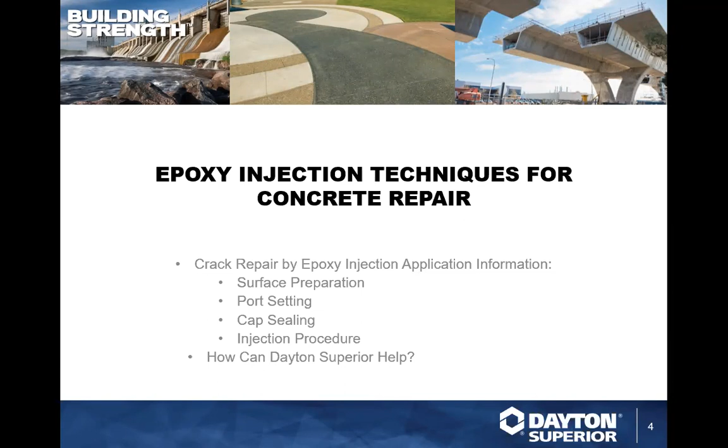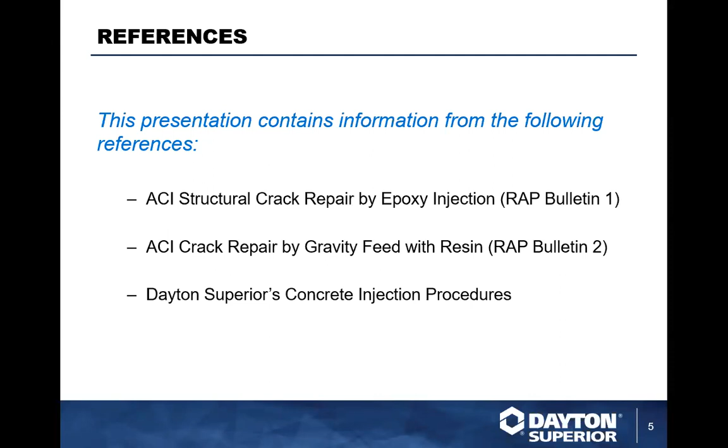Before we get into the weeds, I wanted to point out a couple of documents in particular, especially the ACI RAP Bulletins 1 and 2. The American Concrete Institute has gone through the research and basically standardized everything structural concrete related that there is to regulate and standardize. These two documents are very detailed, very comprehensive in how they address epoxy injection techniques. If you need any information on these documents, or if you'd like us to talk about any of this, feel free to reach out to us for more information.

So the first step to epoxy injection is deciding if you need to inject. I like going over these kind of preliminary steps with all of our chemical products, because no chemical solution is a one size fits all, flex seal type of thing where you just slap the tape on and it stops. There's more research required in any job than just putting down a chemical and calling it a day. So it's really important to understand why the concrete is cracking, and to understand if there's any structural issues.

This is especially true with elevated decks, post-tension, pre-stressed concrete. If you're working on a foundation, a lot of these applications are in foundations. If you need any kind of information about structural repair, make sure to consult with an engineer. The only way we can prevent future cracking and future issues is to understand the full issue and to take a comprehensive approach to repair.

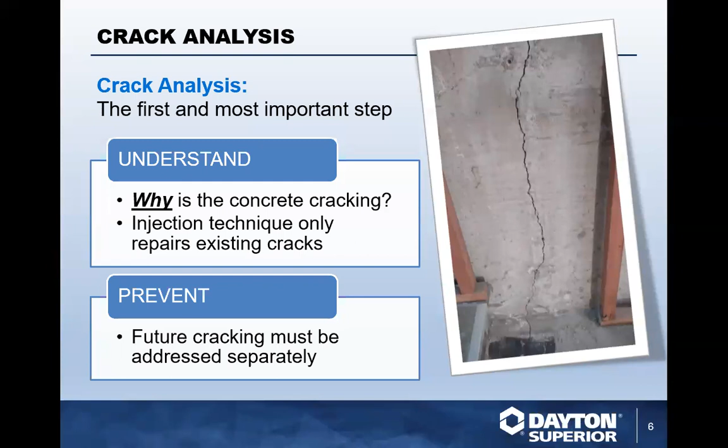So if you're ever dealing with a vertical crack or a horizontal crack in concrete, no matter how wide it is, make sure you're getting a good look at the crack and understanding why there's movement in the concrete, so that you can fix the issue permanently and not do something that's going to be ineffective in the long run.

So once again, we have to decide whether or not epoxy injection is an appropriate structural repair technique on a situation by situation basis. The primary usage of epoxy injection techniques is for hairline cracks or small thin width cracks in concrete that penetrate into the slab or go through a wall, where you're not going to be able to get a trowel down in there. You aren't going to be able to use a cementitious repair mortar to get it in the crack and rebond things that way. You need something smaller, thinner, lower viscosity.

That's why these injection resins have become so popular. If the crack does not compromise the integrity of the structure, there are other options as far as injectable materials, like polyurethane grouts, things along these lines. We aren't going to cover all that today. We're talking about structural repair epoxies, and on a case-by-case basis, these can be very handy tools in your toolbox in terms of repairing structural concrete.

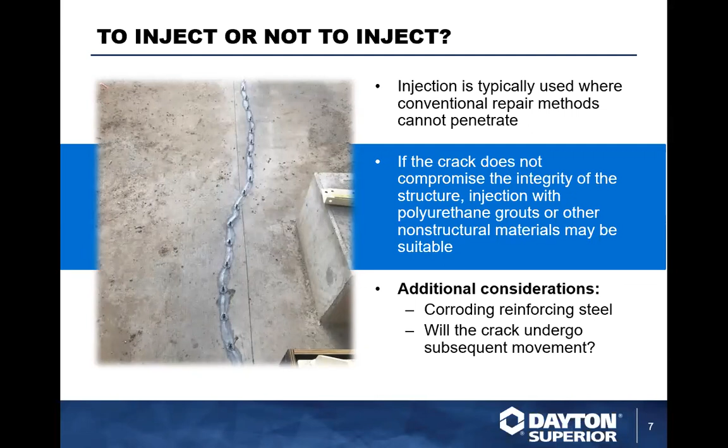And as you get wider in cracks, you can use higher viscosity materials. If you're looking at a 1/4 inch crack, a medium or gel viscosity may be more suitable. So just on a case by case basis, a crack by crack basis if you will, you just need to know what you're doing and pick the right material for the right job.

If you ever have any questions, if you're looking at an injection resin job and you don't know which way to go, feel free to reach out to us. We do this kind of stuff all the time, and we are happy to guide you along your way.

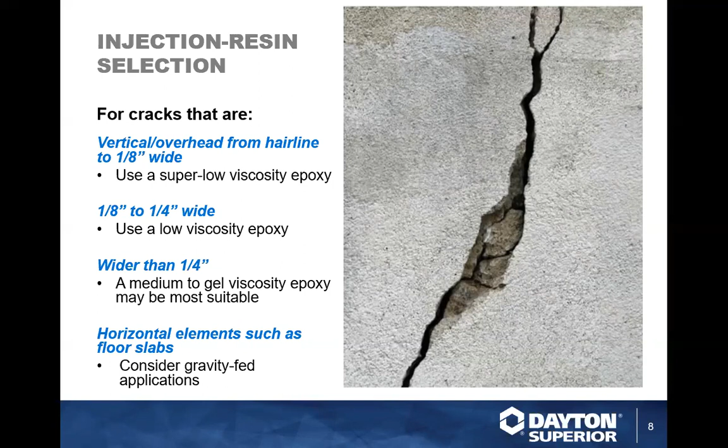Well, you do it, I don't do it all the time. Heidi will be happy to pick a product for you, she'll sign a letter saying it's going to do its job and everything. No, I do too, yeah, I think we'll do that, but it's all good.

Once again, case by case basis, we're looking at different epoxies for these injections. We have essentially two workhorse injection epoxies that we run out. Pro-Poxy 50 is the lowest viscosity, almost water consistency. This is really good stuff for thin hairline cracks or gravity fed repairs. It's moisture tolerant and chemical resistant.

Epoxies are very good at tolerating moisture, tolerating chemicals. Their service temperature and service life is very, very high. It meets ASTM C881, which is your basic epoxy-to-epoxy bonding regulation.

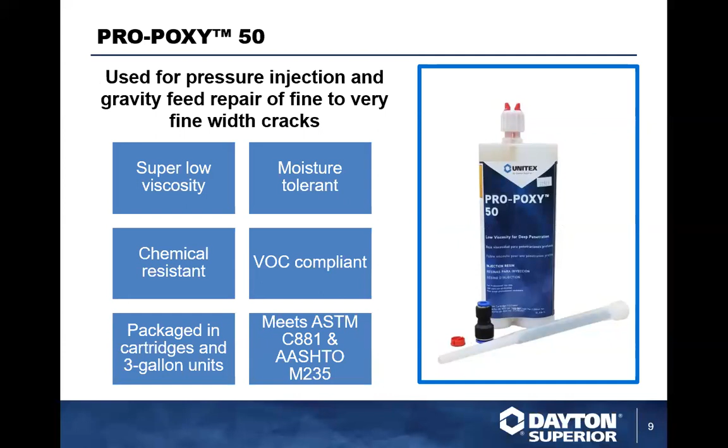It's a very, very low viscosity, very easy to inject, comes in cartridges. You can inject it with a pneumatic, an electric, or a manual 2-component caulking gun. Or if you want to get it in 3-gallon units for a big injection job, you can get it like that and put it into a pump.

Pro-Poxy 100 is very similar, it's not quite as low viscosity. Therefore, we specify it for slightly wider cracks if needed. I don't want to call them interchangeable, but in a lot of cases you can use either one.

The really big benefit of Pro-Poxy 100, if you had to pick one of these to ride with most of the time, unless you need to get into a very hairline crack situation, in which case you want to move to Pro-Poxy 50, is that Pro-Poxy 100 has been tested and is certified for NSF 61, which is potable water, a regulation that comes into play in a lot of scenarios, particularly with wastewater treatment plants.

Wastewater treatment plants are notoriously huge drivers of concrete volume. A lot of times there are injections needed there over time for maintenance. In that case, Pro-Poxy 100 is NSF 61 certified. That's your ball game right there.

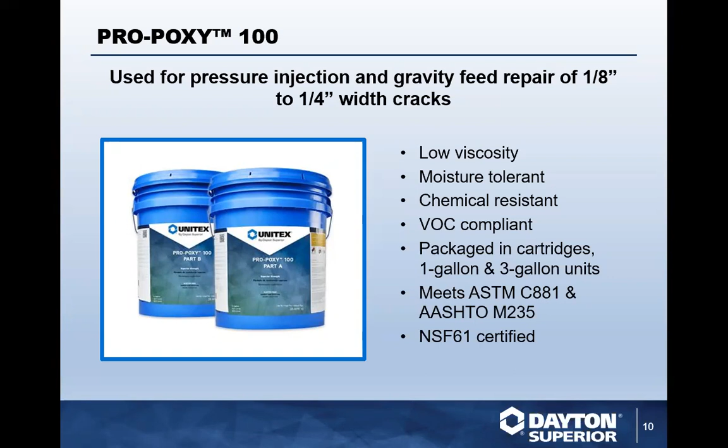That's your boy. I don't know what I'm saying today, a little word jumble. Good stuff though here, very important as well.

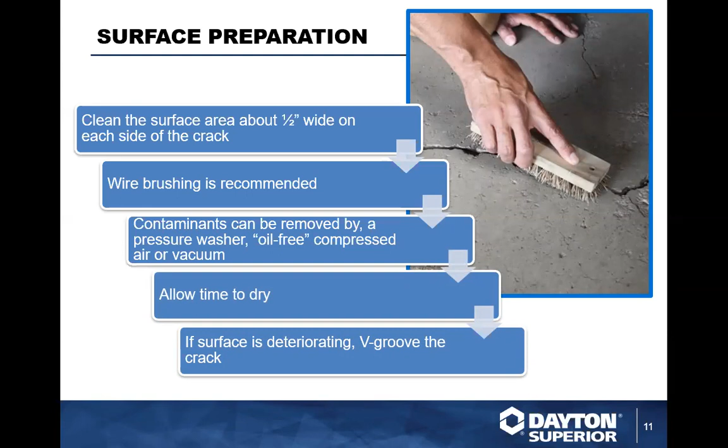Surface preparation is probably the most overlooked and most important part of any concrete repair job. Things need to be clean for things to adhere to concrete, putting it as simply as possible. So all these recommendations and criteria on the left here have been outlined by ACI.

If you're coming on an epoxy injection job and you know you're going to need to do a cap seal, you're going to need to set ports, you're going to need to inject epoxy into the concrete, you need to make sure the concrete is clean. Clean the concrete, it's like my mantra, clean the concrete.

A half inch wide on either side of the crack is what's recommended. Wire brushing is arduous and annoying and laborious, but it's the way we recommend doing this. Mechanical means like grinders create a ton of dust. Dust gets into the crack, dust rises into the air, settles back down, and it's still in the crack. You haven't gotten rid of anything.

Vacuum is your friend, shop vac is your friend, wire brush is your friend. Get rid of all the loose concrete on either side of the crack. If there's any contaminants in the crack, anything that might cause bond breaking issues, address that with compressed air or a vacuum. If there are any deeply embedded grease or oil stains and you're going to be doing an injection, please reach out to us.

We'd like to talk you through some different means by which you can get oil and grease out of the concrete to make sure that the epoxy adheres.

If the surface of the crack is deteriorating, like if you were to knock on it lightly with a hammer and you're getting chip outs on either side, ACI and we recommend that you V-groove the crack using a crack chaser wheel, 4.5 inches normally gets it done, to provide a mechanical profile by which the cap seal can adhere and to make sure that we aren't bonding structurally unintact concrete to epoxy.

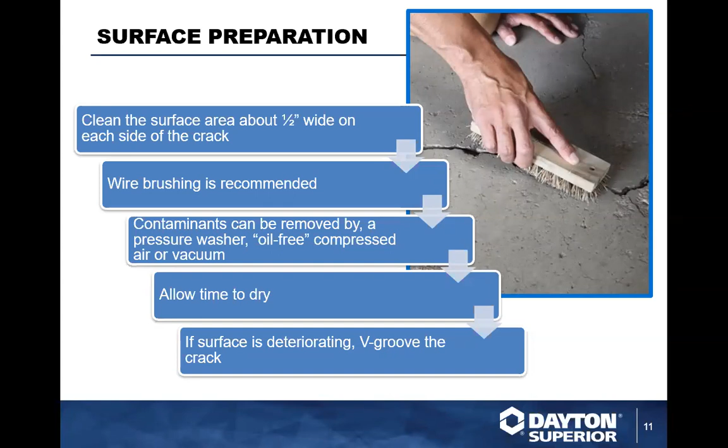Once again, with drilled-in ports, another thing: you're drilling into the concrete, be mindful of dust. A lot of these cracks that go deeper, especially on vertically facing concrete walls, require mechanical port drilling. But if you're going a couple inches into the concrete, be mindful that you're creating dust and you have to get that dust out before you inject the crack. Otherwise, the concrete cementitious dust is going to fuse with the epoxy resin as it's setting, and a lot of times you'll gum up your caulk gun, or if you're using a pump, it'll gum up and you'll be putting more and more pressure while getting less and less material out, because the cement and epoxy have created this gelatinous, stiff, non-moving substance that's just bad.

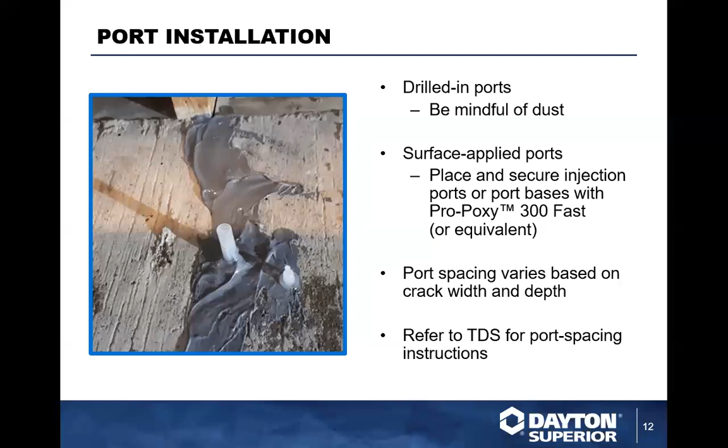Port spacing is kind of tricky. I've seen a lot of different numbers thrown out — 4 inches, 6 inches. I think a good rule of thumb is that it varies a little based on the width and depth of the crack. Basically, all we need to do is make sure the epoxy is getting where it needs to go. Guys who've been doing this a long time have a good feel for it, and once you've worked with these materials, there's a bit of a feel that goes into port spacing. Basically you want to make sure you're covering the entire crack and getting into the entire crack — you want the back side of the crack sealed, especially in vertical and subgrade applications. A lot of times this stuff isn't accounted for.

It's very important that you know where the epoxy is and isn't going. So I'll get off my soapbox and stop that tangent — but in any case, you need to seal the entire crack, because if you don't, the injection resin is going to find its way out of the wall somewhere.

And it starts with cap sealing. Before you inject, you seal the caps and set your ports. A cap seal is generally a structural anchoring adhesive epoxy — we'll get into a few Dayton Superior products that fit the bill later. So basically what we're doing with the cap seal is sealing the crack from the outside so we can set ports and inject into the crack, and the epoxy does not run out the front side of the crack where we are injecting.

Basically, this material needs to be non-sag, it needs to be stiff, it needs to be moisture tolerant so it can deal with a little bit of hydrostatic pressure and the pressure that's going to be put on it during the injection cycle. Working life is important — you need to make sure this stuff holds up for as long as you need it. It needs to be super rigid, it needs to get super hard. Otherwise the epoxy is just going to find its way back out of the wall. It's not going to work.

If you're using a cartridge and you're doing your cap seal, it's a lot like vertical caulking. Just draw a bead. If you need to smooth it out, you can smooth it out with a putty knife or another steel slicking tool, customary to the caulking business.

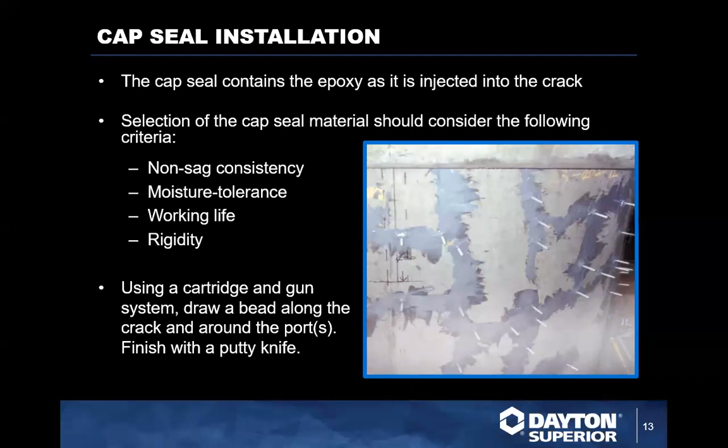You can see what this looks like on the right. This looks like a concrete tank. This photo's from the aughts, probably 2000, 2005 or so. Dayton's been around a long time, we have a lot of old photos, I like them. This is what it's going to look like. You can see they got the cap set, they have their port set, they're ready to inject.

It doesn't get much simpler than this. This is what it's supposed to look like. Basically, you have to have your cap go a half inch on either side of the crack to make sure that your epoxy is not going to leak out the front end of the injection site. It's recommended that the cap seal is applied at 3/16 of an inch. That's ideal, not all of them are. The big reason they're recommending you apply 3/16 of an inch of epoxy for your cap seal is so it's thick enough to take on the pressure of the injection.

Clean surface, half inch on either side, 3/16 inches thick, and then you're going to be ready to go. You're going to be ready to inject. The cap seal should hold up.

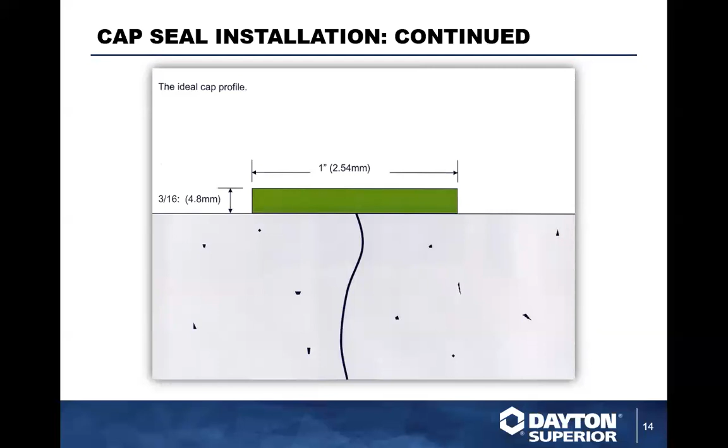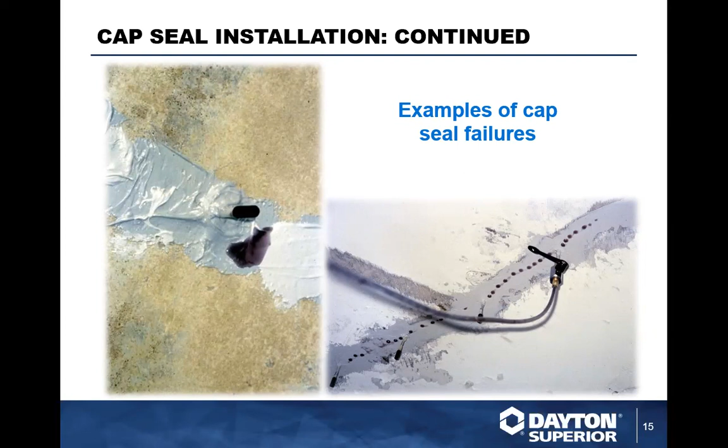Cap sealing materials, we have them. Pro-Poxy 300 Fast is probably the most popular. We have a slower setting variation in Pro-Poxy 300 and a cold weather variation in Pro-Poxy 400 as well. I don't want to confuse you too much with numbers, just know that we have anchoring epoxies that are ideal for cap sealing. Pro-Poxy 300 Fast is fast setting, non-sag, moisture tolerant, VOC compliant, a very popular anchoring epoxy. It's great for cap sealing, very easy to work with, sets up really fast. It's available in single cartridge or double cartridge tubes, or if you're working on a big job, you can always get it in gallon units and it will do the job.

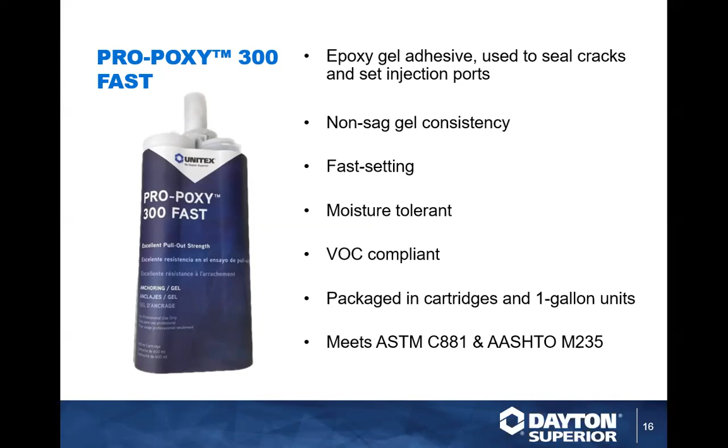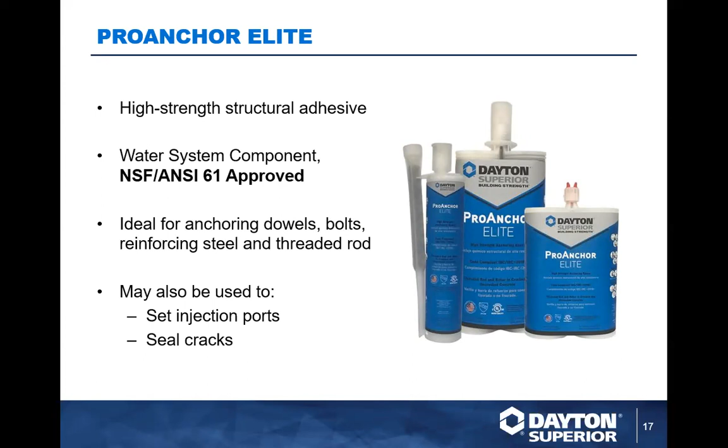Once again, back to NSF 61, water treatment plants. Pro Anchor Elite has been tested and is approved for NSF 61. So if you're getting into a big injection job where potable water and water contact is concerned, Pro Anchor Elite is going to be our selection for that. Also available in a variety of units.

As far as injection procedure goes, after your cap seal is set, after your ports are set, after everything is ready to go, reread the technical data sheet. Always, always, always. I work in technical services, what else do you expect me to say? But mixing epoxies and pumping epoxies, it's a job by job thing. If you've used one, you haven't used them all. So make sure you're mixing in accordance with the manufacturer's technical data sheet.

Double check your cap seal and all of your ports before you start injecting. If you've done this before, a quick look is probably going to be what you need. Just look at everything, make sure you're not seeing the side of the crack. Make sure you're not seeing any weird angles where you can see into the crack from any side of the cap seal. Make sure that the ports are set well and that there's no issues with gaps between the ports and the concrete, like we saw in that one photo with the cap seal failure.

Start at the widest section of a horizontal crack, so basically wherever it's biggest, that's where you're going to start if you're working up or down. And if you're working from a vertical plane, start from the bottom and work your way up. And that's going to be basically how it goes.

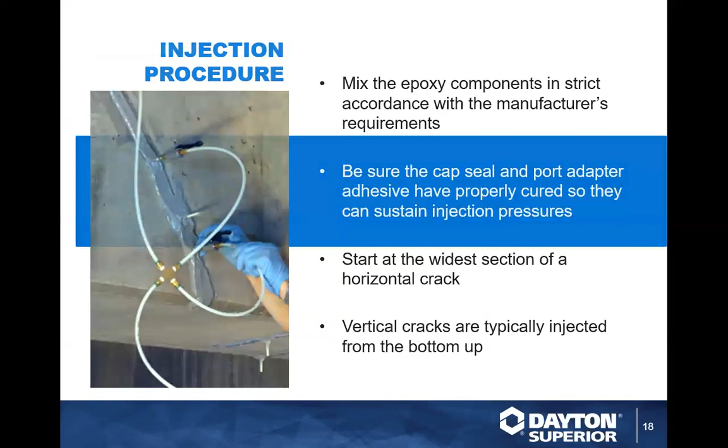Here's another picture of a gun. You're going to inject until refusal. That's how you know you've injected the entire crack, without X-ray vision or any other superpowers I'm not aware of.

Eventually the material is going to stop feeding, or you're going to have all your ports where it's coming back out - all of your ports, you've capped all your ports. At that point, you're done.

As long as there is not epoxy coming out the back end of the crack, which is super common, especially in residential applications. So if you work in the residential world and do a lot of subgrade foundation work, it's best to have a good look at the outside of the house before you start injecting epoxy. Otherwise, the epoxy could all end up on the other end of the wall.

So once again, continue injecting until refusal into the ports. If you're going from port to port to port, the adjacent port will start bleeding. You're going to cap that port, cap the port you're on, and move to the next port. Eventually, you're going to run out of ports.

It's as simple as that. Hairline cracks can be finicky - they may require increased pressure. But one step at a time as far as increasing pressure on your pumps - we don't want to just go gung-ho and blow everything out. So just slowly increase the pressure in the case of a hairline crack, and eventually you'll get there.

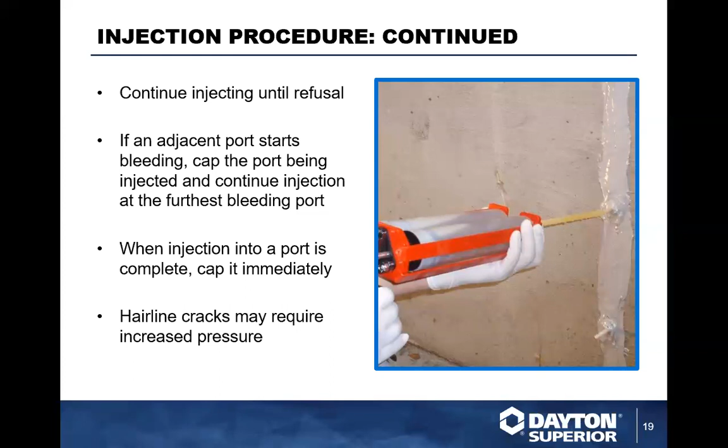Here's another old photo. This one looks like it's from the 80s or 90s. I love this guy, he's just perching. I don't know what he's even standing on there. Probably a countertop. So this is a non-safety feature, right? Yeah, we like to talk about safety a lot here, and this guy is not playing it by the 21st century books here.

But this is what it looks like, nothing fancy. We have a crack on an overhead horizontal plane. He has a pump - you can see there's two sides, A and B, the metal containers. The pump is bringing pressure and bringing the injection resin up into that crack. He has his cap seal, he has his port set. That doesn't look like it's going to be too bad.

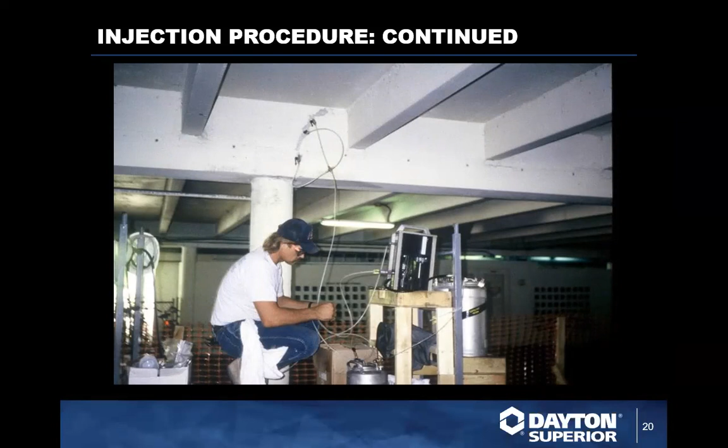Now this, on the other hand, whew, this is kind of a mess. I like this photo a lot though, because it shows you what happens if you don't find the entire crack on a wall. You start injecting, you set your caps, you have all these ports set, you have your cap seal set. And next thing you know, down at the bottom right, you can see resin's just running out of the wall.

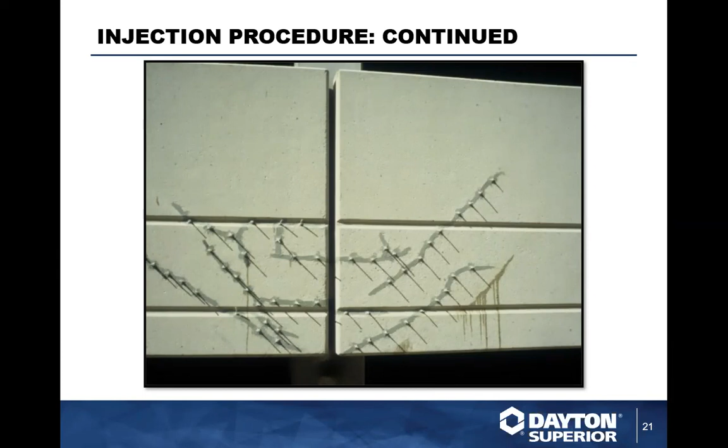That is the definition of a hairline crack - they didn't even see it when they set their cap seal. So if you ever see that start happening, I recommend turning off the pump, stop shooting, let everything fizzle out there for a minute, and readdress. Looks like they're going to need to go back and set some more ports and seal off the remainder of that crack down there so they can get full penetration of the injection resin. Because if it's running out the front side of the wall, it hasn't gone the whole way through.

Finishing touches - a lot of this stuff is sort of architectural, and once again in residential applications, somebody's going to want a clean basement wall after they've had their wall injected. But chipping or grinding is good to remove the cap seal.

If you ever need to check the repair, core samples are really the best way to do that. There are all kinds of new fangled technology machines that I don't really know a whole lot about, in terms of impact echo and ultrasonic pulse velocity. There are a lot of ways to check and make sure that the repair has been done.

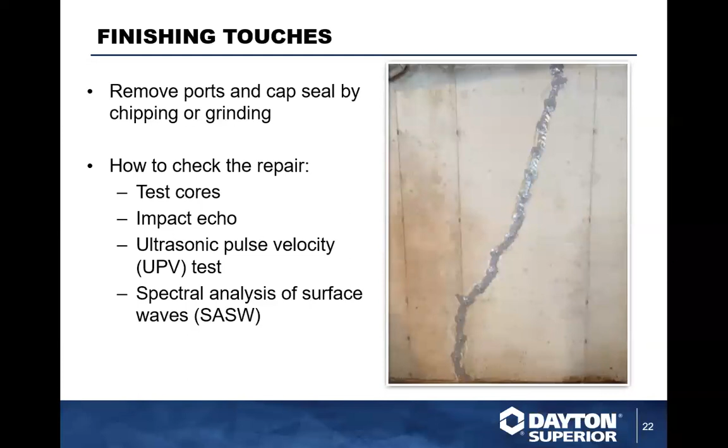If worse comes to worse though, and you need physical evidence, core sample is the way to go. But ultimately, if water stops coming through the wall, that normally means you've fixed the deal.

And this is what it looks like when you're done. That's the same wall as that mess of an installation with the hairline. Awesome.

So yeah, you grind off all the epoxy, the cap seal, and you can see they came back there. It looks like they used something kind of like maybe a lighter tinted version of Superior wall finish. I wonder what that is.

Yes, I think we have a training Tuesday on that. Oh, do we? Yes, we do.

But yeah, thin set repair mortar just to architecturally make that look good. But that's what you're going to do: get all that epoxy off there, get the ports off there, refinish the wall.